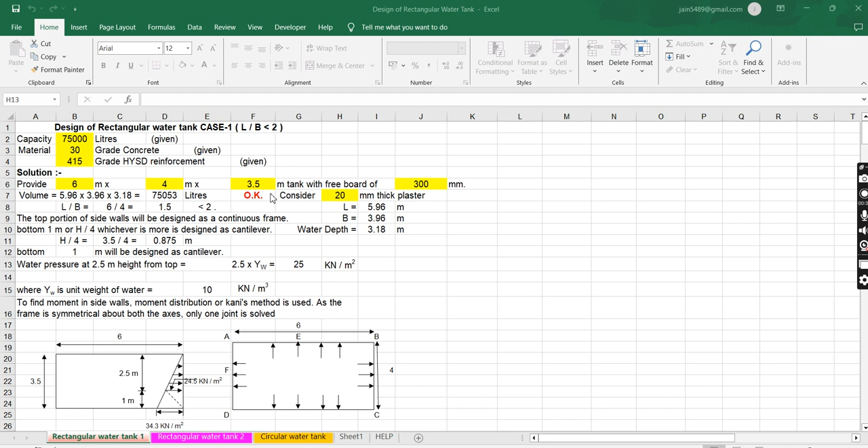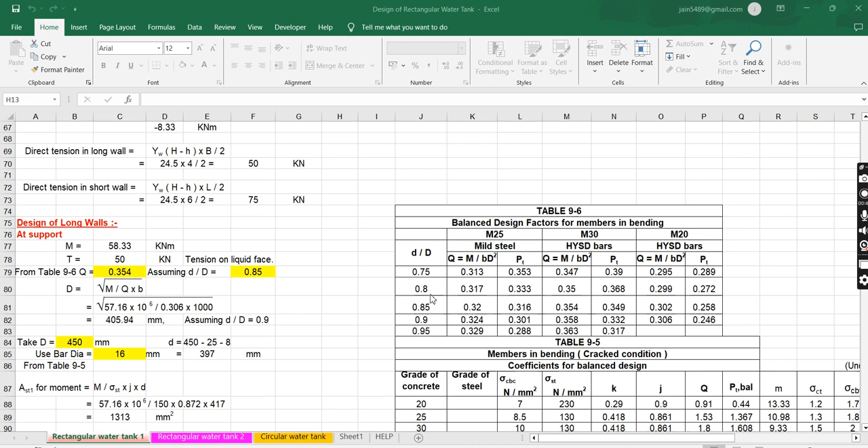After that, provide length, width, and height of the tank in meters with freeboard in millimeters, and consider 20 millimeter thick plaster such that the OK check is met. For design of the long wall at support, enter the Q value for the assumed d by D value in the yellow cell from table 9.6. Now provide thickness of wall as per required thickness and bar diameter used in the yellow cell.

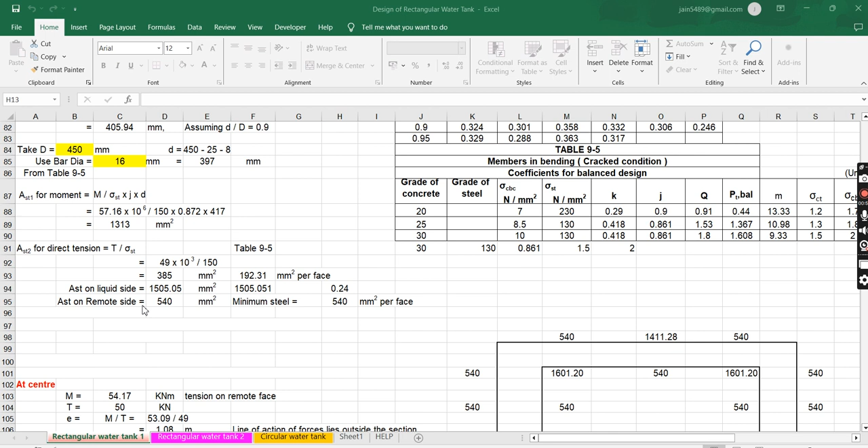You will get the required area of steel at liquid side and remote side. Similarly, you will get the required area of steel at center of long wall at liquid side and remote side. After that, provide steel diameter for vertical steel marked C in the yellow cell. You will get the required area of steel at liquid side and remote side.

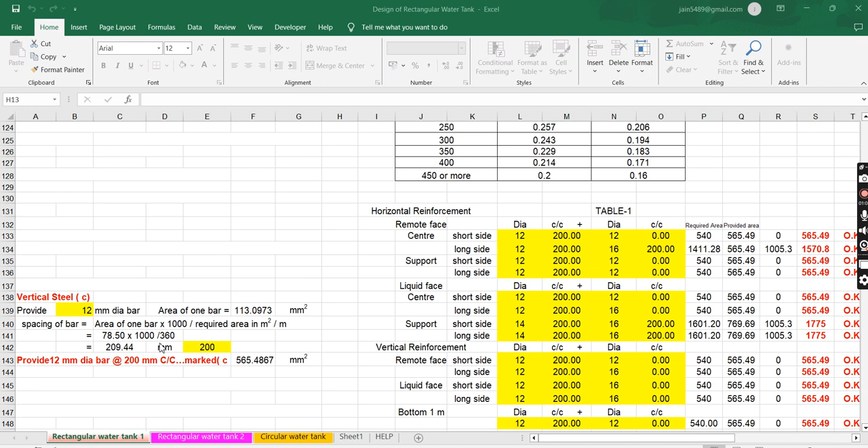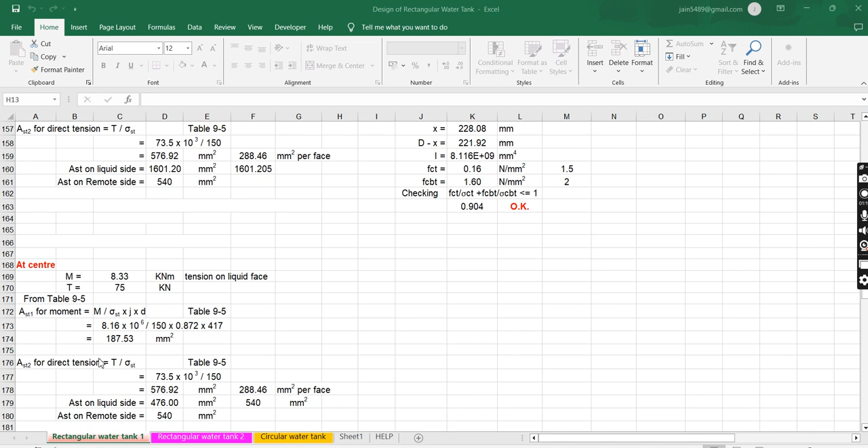For design of short wall at support, you will get the required area of steel at liquid side and remote side. Similarly, you will get the required area of steel at center of short wall at liquid side and remote side. Bottom 1 meter will be designed as cantilever. You will get the required area of steel.

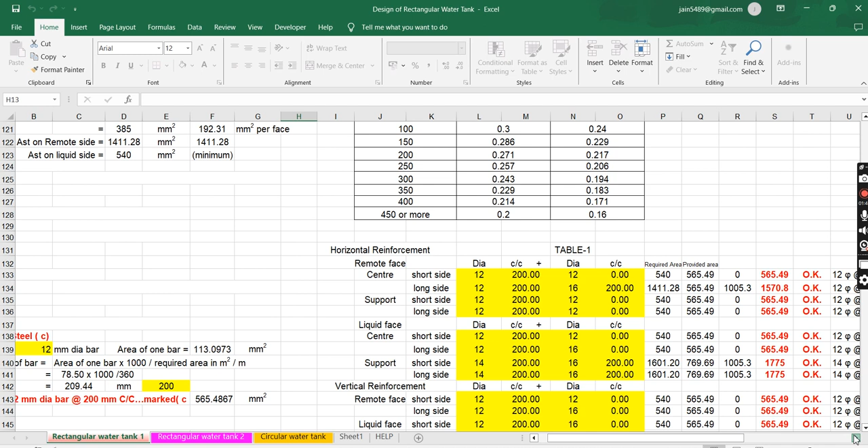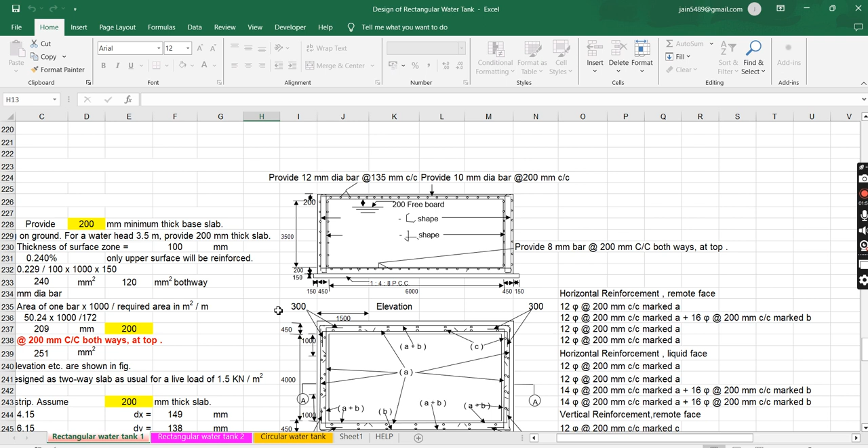For design of base slab, provide thickness of the slab and steel dia used in the yellow cell. You will get the required area of steel and spacing of steel. Enter appropriate spacing in the yellow cell. For design of top slab, provide thickness of the slab and appropriate Ly by Lx in the yellow cell. After that, provide Q value according to d by D value in the yellow cell from table 9.6.

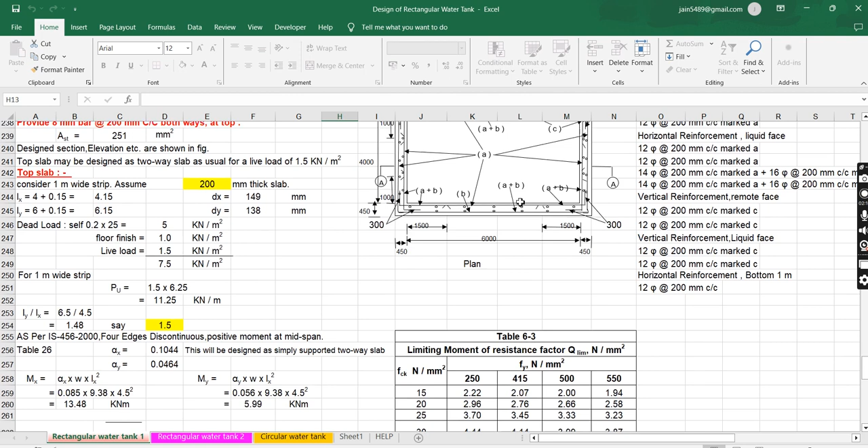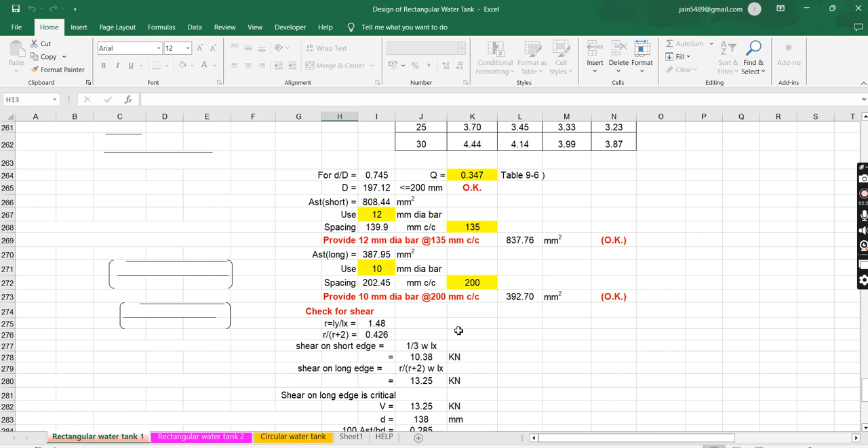Now enter steel bar diameter used for short wall and long wall. You will get the spacing of bar. Provide appropriate spacing in the yellow cell so you get OK. You have to see that the check for shear requirement must be OK. In the drawing you can see the arrangement of reinforcement.

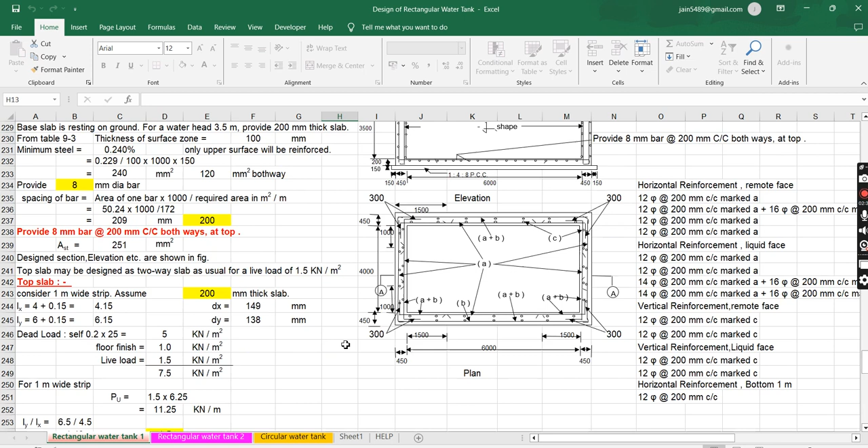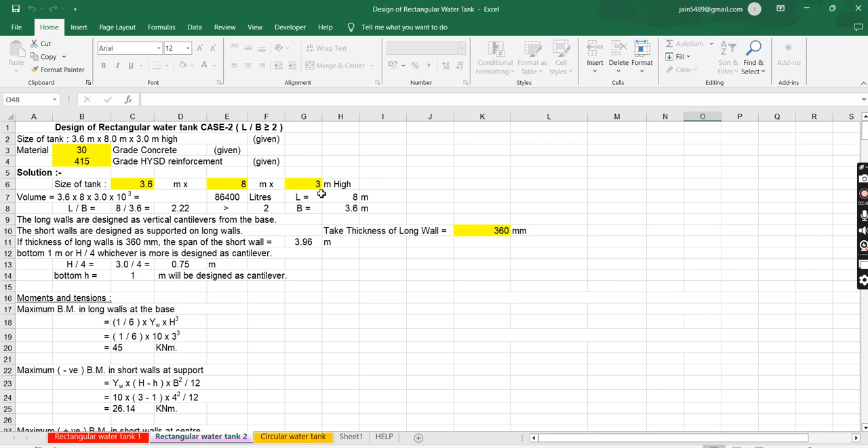Similarly, a rectangular water tank with length by width ratio greater than 2 could be designed. You have to enter data in the yellow cells. First of all, you have to enter concrete grade, steel grade, and size of tank width, length, and height in meters in the yellow cells. After that, assume thickness of wall in millimeters in the yellow cell.

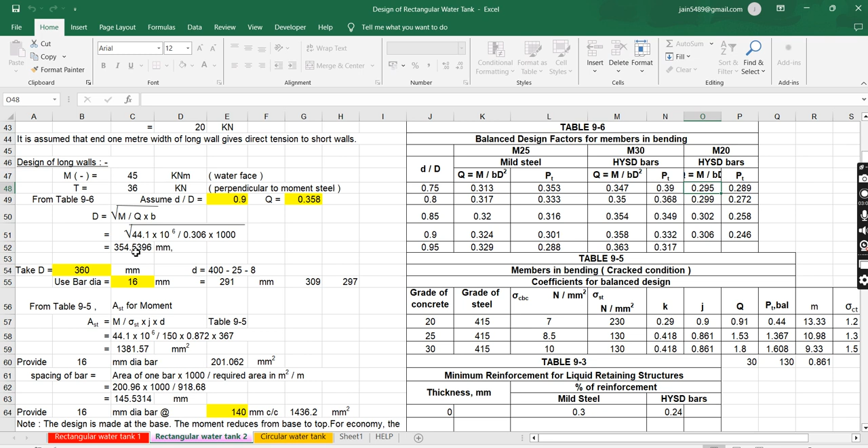For design of long wall, assume d by D value and corresponding Q value from table 9.6. Now provide thickness of wall as per required thickness and diameter of bar used in the yellow cell. You will get the required spacing for vertical bar at liquid face. Provide appropriate spacing in the yellow cell.

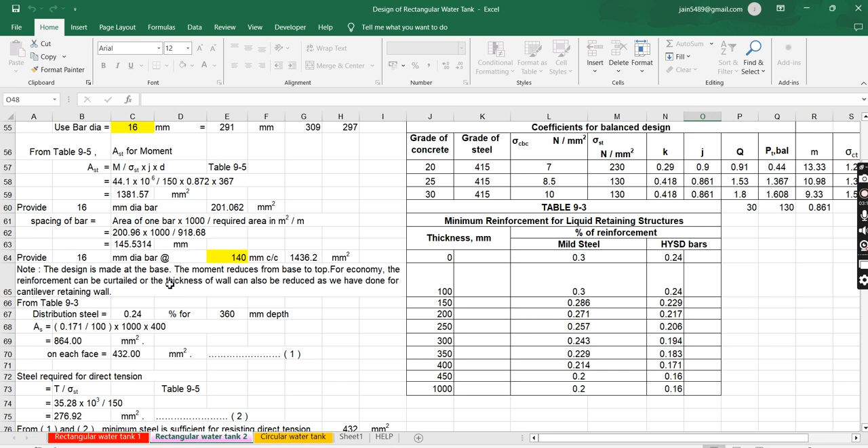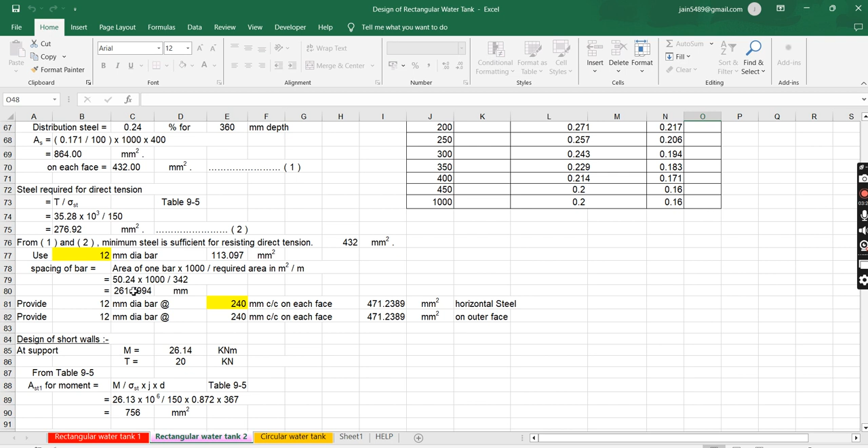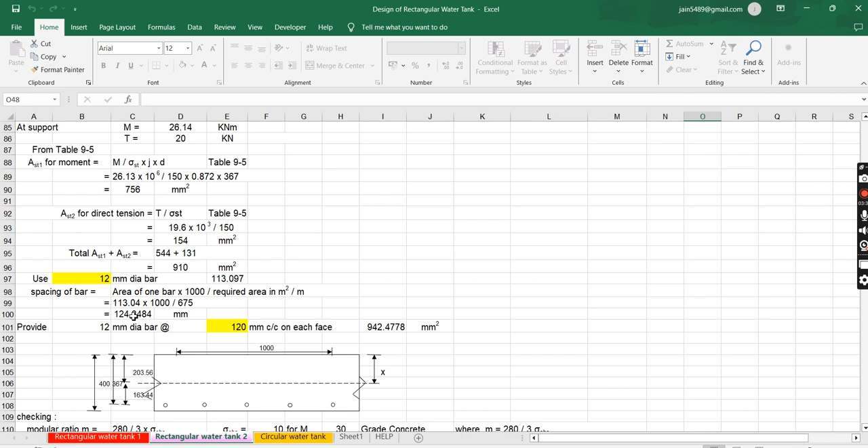For vertical bar at remote face and horizontal bar at liquid face and remote face, provide diameter of reinforcement in the yellow cell. You will get the spacing of bar. Provide appropriate spacing. For design of short wall and long wall at support, provide diameter of reinforcement and you will get the spacing of steel. Provide appropriate spacing in the yellow cell. You have to see that the check for stress must be OK.

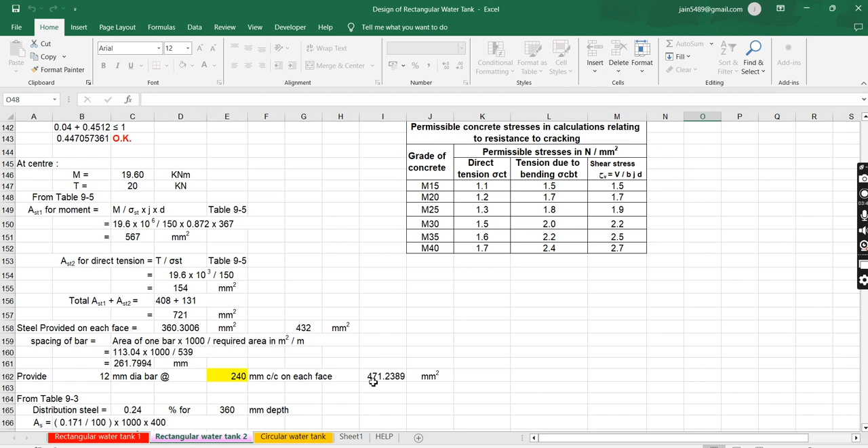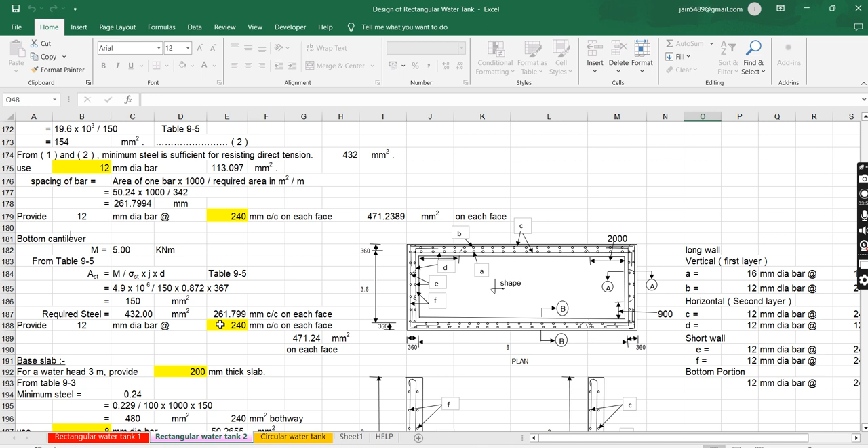Now for design of short wall horizontal bar, you will get the required spacing; provide appropriate spacing in the yellow cell. For design of bottom cantilever portion horizontal bar, you will get the required area of steel and spacing; you have to enter appropriate spacing in the yellow cell. In the drawing you can see the arrangement of reinforcement marked A, B, C, D, E and F.

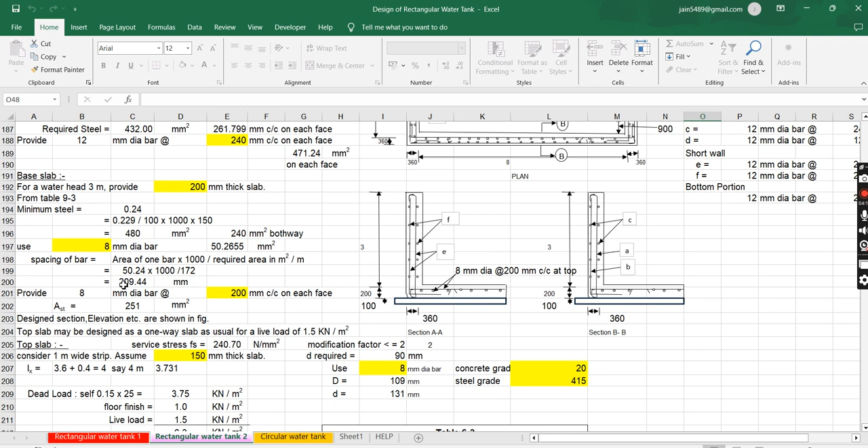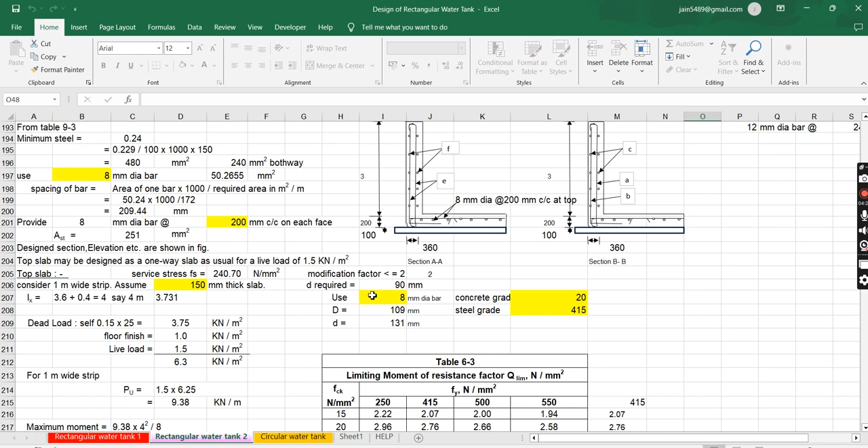For design of base slab, assume thickness of slab and diameter of bar used in the yellow cell. You will get the spacing of bar; provide appropriate spacing in the yellow cell. For design of top slab, assume thickness of slab as per requirement and provide steel diameter, concrete grade, and steel grade in the yellow cell. Thickness of slab must be such that the OK check is coming.

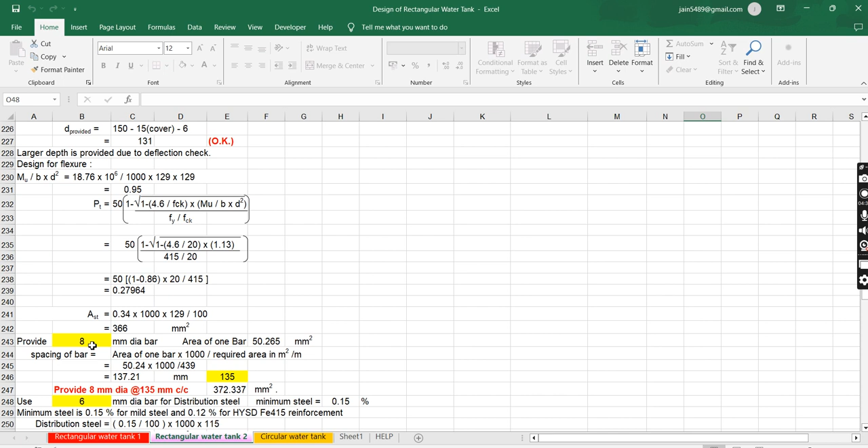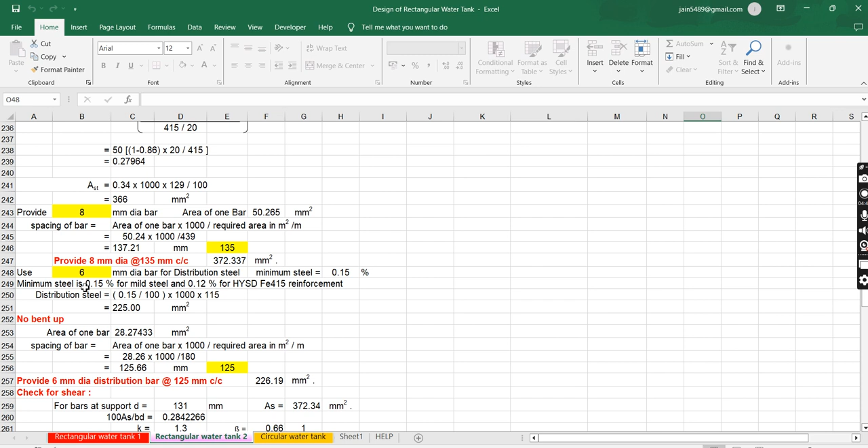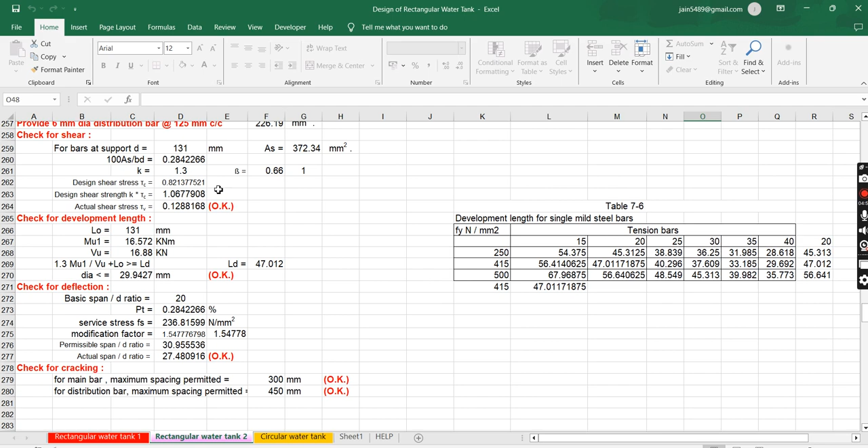After that, enter diameter of reinforcement in the yellow cell; you will get the spacing of bar, provide appropriate spacing in the yellow cell. For design of distribution bar, enter diameter of bar in the yellow cell; you will get the spacing of bar, enter appropriate value of spacing in the yellow cell. You have to see that check for shear, check for development length, check for deflection and check for cracking get OK; if not OK, change thickness of slab. In the drawing you can see the arrangement of reinforcement.

Similarly, a circular water tank could be designed. You have to enter data in the yellow cells. First of all, you have to enter capacity of tank in liters, concrete grade, and steel grade in the yellow cells. After that, provide depth of tank with freeboard in the yellow cell so that diameter of tank and thickness are obtained. Provide appropriate diameter of tank and appropriate thickness.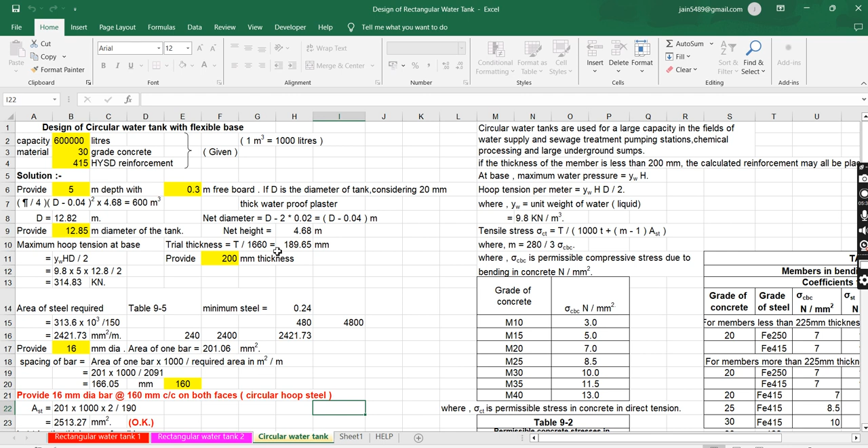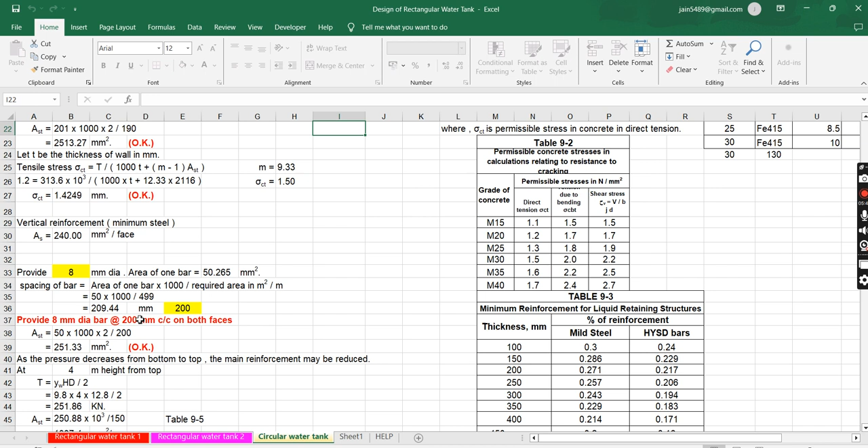Now for design of horizontal circular hoop steel, provide diameter of steel; you will get spacing of bar, provide appropriate spacing such that check is OK. For vertical steel design, enter diameter of steel; you will get the spacing of bar required, provide appropriate spacing in the yellow cell such that check is OK.